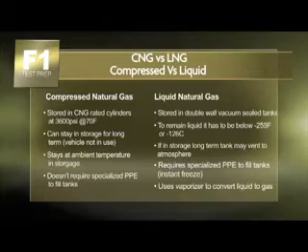Okay, fuel basics. Compressed natural gas is basically methane, CH4. Methane is lighter than air, so it's going to rise to the ceiling. So if it vents or leaks, it's going to rise, whereas propane stays down towards the ground. So keep in mind with natural gas, anything that leaks out of it is going to go up.

The octane equivalent is 120 to 130 octane. From a performance standpoint, that's excellent. We like it from the performance aspect. From an environmental standpoint, hydrocarbon-wise, it is the least reactive with sunlight. Compared to gasoline, gasoline is the worst, compressed natural gas is the best. Natural gas is the way to go from an environmental standpoint.

Also, it forms less CO2 when we burn it, which matters when we talk about fuel economy, because European standards go by CO2 emissions, not miles per gallon. So if we look at it from that standpoint, we produce less CO2, which would equate out to, in a way, better miles per gallon.

We have more BTU than gasoline per pound. Gasoline is a liquid down to 45 degrees below zero, total liquid, while compressed natural gas stays gaseous until 259 below. So when you average it out, in a gaseous state obviously we can't store as much, but we do have more energy content in natural gas if we could get it on equal terms with gasoline.

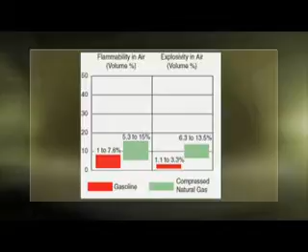Explosivity, there again - how many people have ever taken a match and just tossed it over towards a pan of gasoline and had it light off? That's not going to happen near as much with CNG as it would with gasoline. So natural gas is a little bit safer in that respect, but at the same time, it is still something we have to be concerned about as far as flames and flammability. So it's not a totally safe fuel by any means, but it is a little bit safer than gasoline to use.

Okay, general safety. Now, general safety for natural gas. First and foremost, we're going to store it in tanks between 3,000 and 3,600 psi. The thing to keep in mind about that, since it is under pressure, if we get a leak, we're going to end up with some refrigeration or coolness feeling. But the thing to keep in mind is that it is stored at ambient temperature.

It has detection fragrance added to it also, so keep in mind that compressed natural gas has an odor to it. If you've ever had a gas stove at home that hasn't lit off, you'll have that same odor.

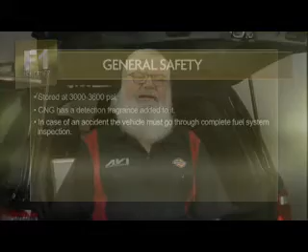If you have an accident with the vehicle, you have to go through a complete inspection of the fuel system to make sure there are no leaks, no damages to anything. We have tanks that have weight associated with them. We have to make sure that they stayed mounted down, didn't move, didn't cause any damage at all. Same thing with the fuel system - we have to go through and make sure there are no leaks out of it at all.

If you've got to depressurize the fuel system before any repairs are done, you want to make sure that there isn't any pressure to the system. Keep in mind, our base system coming out of the tanks is 3,000 to 3,600 psi. Once we're going into the vehicle, we could have pressures as high as 150 psi, depending on the type of system that we have. So if we're going to do a repair, we have to depressurize it properly.

And then after any repair to the system at all, we have to do a thorough leak test using the proper type of leak detection methods to make sure that we don't have a leak. There again, the problem that we have is that we could have a fire that could develop - same thing as with gasoline. If we get an explosive atmosphere under the hood or around the vehicle because of a leak, we don't want it to actually cause a fire and burn down.

Vehicle safety should have a visible label in the engine compartment that identifies the vehicle as being CNG fueled. Our fueling connection should be labeled as CNG. As you can see over here, we have our vehicle sitting next to us - it has the CNG label by it.

If you have any O-ring that's there on the fitting when you service a fuel system, you have to replace the O-rings that are there. The O-rings are supposed to be new anytime you break the fuel system loose. All tubings and hoses have to be permanently marked that they're CNG. So same thing as if you're doing stuff with brake lines and brake hoses - same thing with the CNG. They want to make sure that it has the CNG approval on it for what it's used.

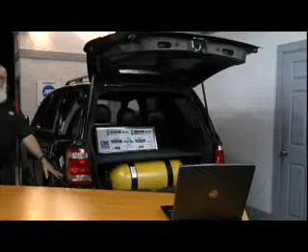So at the same time, we have a specialized dash cluster that shows how much we have in our tank, and then we have our compressed gas engine assembly, which has its special hardened valve seats so it can actually operate properly, along with the pressure regulator.

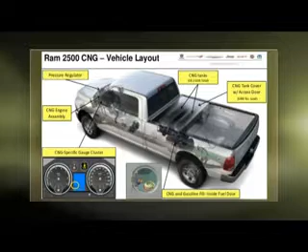Shop safety, when you're going into it, all electrical outlets or anything electrical has to be at least 18 inches below the ceiling. You need to use explosion-proof lights. We want to make sure there aren't any sparks that could cause an explosive atmosphere to go off. You want to consult NFPA 52 and 30A regulations along with your local, state, and federal guidelines as far as setting up a shop to do it.

Most shops that are doing repairs right now have been through that, and the one thing to keep in mind is your local fire marshal is the one that has to say over anything concerning regulations as far as what you follow. You need methane detection and additional ventilation to go with it.

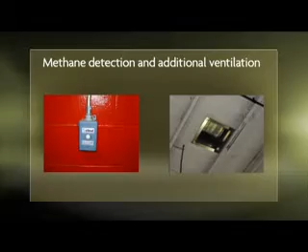On the slide I just brought up, it does show part of the detection as far as methane. It also shows additional ventilation that has been put in the roof of this facility where I took the picture. The thing to keep in mind is if methane is detected, the vent automatically opens and vents the entire shop, allows the bay doors to come up automatically so we can move 8 times the amount of normal air through the shop to get rid of the methane.

And this could happen even if you were not at the shop at the time. If the methane detector went off, your bay doors go up automatically, the fans turn on, and it sucks all the air out so we don't have a fire.

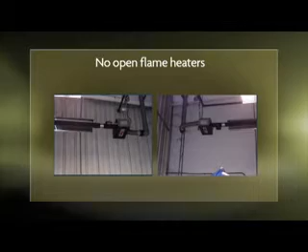No open flame heaters at all. This came from a shop up north, but we have radiant heaters and it's all entirely enclosed, so we don't have any type of flame that could come through. If you're working down in the south, obviously that probably wouldn't be an issue. You can go out underneath a carport somewhere, but where I'm from, up north in Indiana, you definitely need the radiant heaters in the shop.

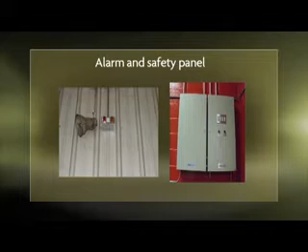Alarm and safety panel. That's part of the methane detection and part of the ventilation requirements that they have. You're going to have alarms that go off. It shows on the pictures there, you have 2 different lights that are going to flash and the actual detection panel that goes off. That's all part of the system that goes in.

From a cost standpoint, it is going to involve some high investment dollars to be able to get in to do repairs. Keep in mind, if you're working on a system where the tanks are removed from the vehicle or they're vented totally all the way, now you don't necessarily need this stuff to be there. We'll be coming up to doing vehicle inspection and condition in the next segment.

Okay, vehicle inspection for condition, suitability, and compliance. Now, this is pertaining mainly to aftermarket conversions. OEMs have already addressed a majority of these issues. So keep in mind what I'm talking about here is if you want to do a conversion on a vehicle. When we go to convert a vehicle, things that we have to keep in mind.

Engine condition. The engine has 100,000 miles on it and needs to have some rebuild done to it. You're going to have to do that before you do the conversions. You have the increased weight of the natural gas cylinders themselves. Depending on the type of cylinder that you use, you could be talking of adding as much as 1,000 pounds of weight to the vehicle just for storage of the CNG.

Ride height specifications, if I'm going to add that much weight to the vehicle, it's going to affect the ride height. Road clearance requirements: the specification for road clearance, if it's under 125-inch wheelbase, is supposed to be 7 inches with flat tires. So if you're going to store tanks underneath the vehicle, you're going to have to do some measurements to do that. If it's greater than 125-inch wheelbase, now it's 9 inches of clearance.

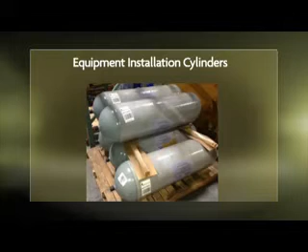When we look at cylinders, we have different types of cylinders that you can see. So keep in mind that when we start putting the system on, the cylinders we put on are going to be an issue. And when we come to our next segment, we're going to talk about the actual different types of cylinders that there are and what the costs of those are.

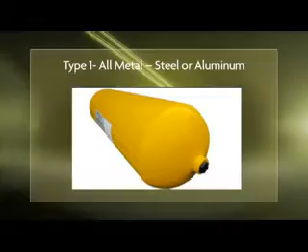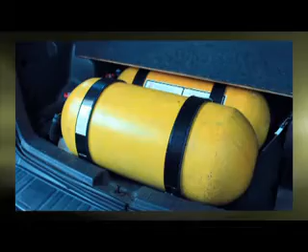Now that we're getting ready to do the conversion types of cylinders, the first type we're going to talk about is a Type 1 cylinder. Type 1 cylinders are made out of all steel or aluminum. This vehicle right here has Type 1 cylinders in it, and as you can see, they're nice and yellow, but they also look fairly large and bulky.

But they are the most inexpensive type of cylinder out there. They are the heaviest though. So if we look at considerations on cylinder types, a Type 1 cylinder would be the cheapest way to get in, but at the same time, it's also going to be the heaviest and going to require the most modifications to the vehicle.

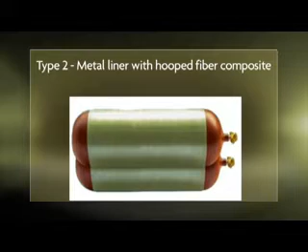Now, a little bit lighter, a different type of cylinder would be a Type 2. That's a metal liner with a hooped fiber composite. The biggest difference is I just got a little extra protection using the fiber composite on the cylinder, and I can take a little bit of the metal away from the actual cylinder construction itself. That lightens up the weight some. So from a cost standpoint, we just about tripled the cost of our cylinder now.

The next type of cylinder is a Type 3. Type 3, we have a metal liner that's completely wrapped or enclosed by a fiber composite. Now there's two things that go with that. One is when we fill a compressed natural gas cylinder, we get heat. The metal liner on the cylinder helps conduct the heat away so you get a more complete fill. So on a Type 1, Type 2, and Type 3 cylinder, that metal liner is going to act as a really good heat sink.

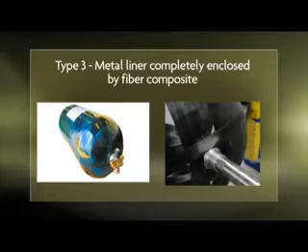On a Type 3 cylinder, the metal liner is a little bit thinner, so now we're actually saving some weight in the vehicle, which allows us to have better weight savings. The fiber composite that goes around there is going to give us a little bit more protection as far as durability.

And then finally, the Type 4, we have a thermoplastic liner that's wrapped by a fiber composite. Now this is the lightest, but it's also the most expensive, so now you have cost versus expense coming into play. We have a total plastic liner wrapped by a fiber composite. So basically, we went from a 1958 Cadillac to a Lotus made out of all carbon fiber as far as weight, if you want to talk performance of a cylinder and relate it to a car.

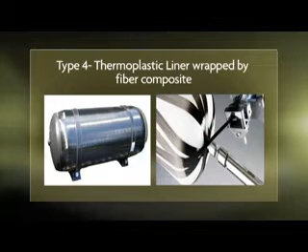But the thing to keep in mind is the Type 4 is the best as far as weight savings, so I wouldn't have to worry too much about adding a whole lot of suspension modifications, as far as springs, to a vehicle for it. The next slide shows the different types of cylinders as far as a cutaway. A Type 1 cylinder, since it's all metal, with filling and unfilling it, all the stress of the cylinder is going to be supported by the metal cylinder itself.

In a Type 2, when we put the composite hoop around it, that cylinder is taking 45% of the stress, and the composite is 55% of the actual stress. In a Type 3, the metal liner takes 20% of the stress, and the composite fiber takes 80% of the stress of filling and unfilling that goes with pressurizing and depressurizing the cylinder. Last, on the Type 4, the composite wrap takes 100% of the stress that goes with pressurizing and depressurizing the cylinder. With that being said, that allows me to use the lightest weight.

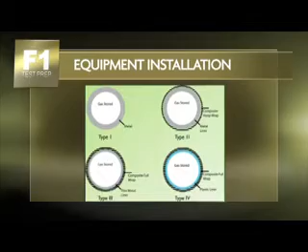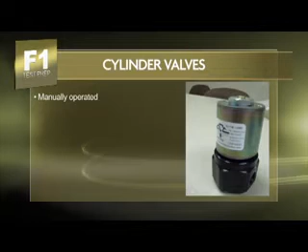Okay, now cylinder valves. We have two different types of cylinder valves that we can come across. One of them is manually operated valves. I don't think I need to explain that too much - obviously, you're going to have to go out and do it.

The other is electrically operated valving. Electrically operated valves are normally closed. They're going to be energized or turned on either by the ECM or the ignition switch. So the thing to keep in mind is if I have an electrical valve, I still have to have a way of manually overriding in case I have an electrical failure if I have to vent the tank.

Now, the next slide I brought up is a tank valve wrench. Most manufacturers, unfortunately, use their own methods for being able to put a tank valve in, so you have to have their tank valve wrench to change their valves out. The thing to keep in mind about valves is if I have to change the tank for some reason, I'm going to change the valve out - I'm not going to get a new tank with the valve. So the tank valve wrench is going to work really well if it was designed for that valve, so it actually takes it on and off without causing damage to the valve itself.

The other thing is the pressure relief device. The pressure relief is what's going to actually come into play if I get too high of a pressure in the tank. Tanks are rated to a certain amount. If my tank pressure exceeds 5,000 psi, I'm going to vent that tank. That way I don't have to worry about the tank exploding. So I have a burst disc built into the valve assembly that allows the pressure to get vented out of the tank if the tank pressure gets too high.

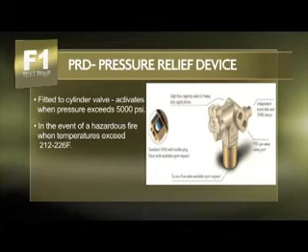The other thing is, if there's an event of a fire, same type of thing - it's going to cause the pressures to increase. Now, the pressure relief device for heat is like a lead plug that melts out and allows the tank to vent. That is going to be between 212 and about 226 degrees. So I have two actual pressure relief devices that are part of the valve - one has to do with pressure, the other has to do with heat. It's all designed to get rid of the pressure in the tank and allow it to go to the atmosphere. Sure, there's a fire going on, but what would you rather have? A little extra flame or a big boom that can do more damage to people? I think I'd rather have a little extra flame myself.

Okay, tank venting. Now, if the tanks are underneath the car, tank venting, no big deal - we can just let them vent. But if it's actually mounted inside a passenger compartment, like behind the back seat or in the trunk area, then we actually have to run vents outside the vehicle. So venting the tanks outside the vehicle, the slide that I have here actually shows the tank vent coming from inside the vehicle outside, and then it also shows a 90-degree manual shutoff valve for shutting the system off.

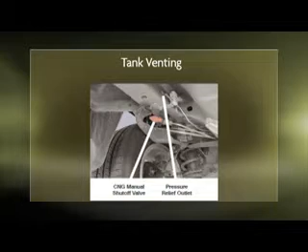On this picture, you're reaching through the wheel well right behind the left rear tire to go in and hit the manual shutoff valve. Another type of manual shutoff valve here shows an actual panel. You cannot have them locked, you can't use a tool. You can have it to where it uses a latch to keep it shut, but there can't be anything to lock the panel to get to the manual shutoff. So it has to be a quarter turn type or a ball valve, and it has to be clearly marked with red, blue, or black letters on a white or a silver background.

As you can see, this panel here also has gauges on it to show the high pressures and the low pressures of the system while it's operating, and it does include the fill for the vehicle too.

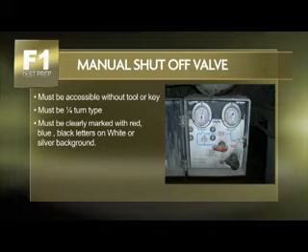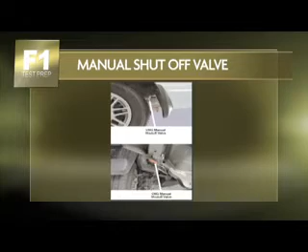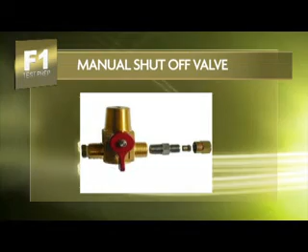If something were to happen and you needed to turn it off, say you had a major leak under the hood, you could reach in behind the wheel and shut the system off without worrying about it venting out. If you were doing an add-on system, here's a manual shutoff valve, something as simple as that, as long as it's a 90-degree type, but this is another type of manual shutoff valve.

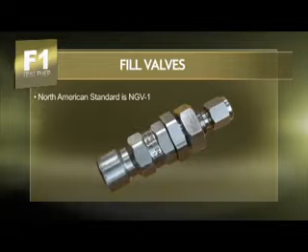Now, fill valves and filtration. First on fill valves. All fill valves in North America follow NGV1 standards. That's clearly marked on the actual filling port itself. They're color-coded for different working pressures: green is 2,400 psi, blue is 3,000, and yellow is 3,600 psi.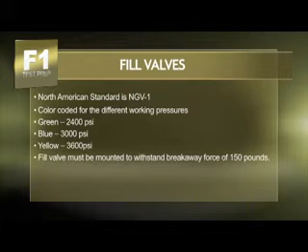The fill has to be mounted to withstand a breakaway force of 150 pounds. The hoses used for filling have a breakaway support set at 150 pounds, so it makes sense that the fill mount has to withstand the same. If you drive away while hooked up, it has to withstand 150 pounds of force so the hose breaks off and the built-in safeties take effect, instead of you breaking off the fill port and emptying a tank with 3,600 psi in it.

As far as filling it, you have to have enough clearance to allow the nozzle to hook up to the vehicle. So when deciding where to put this fill valve during a conversion, keep in mind you need enough clearance to fit the fill nozzle. If you wanted to put it where the fuel door is, there might not be enough room, so you might have to put it somewhere else, whether outside the vehicle on the side or even under the hood.

No matter where you put the fill valve, it has to be able to withstand that 150 pounds of force. The other thing to keep in mind is you always want the little cap to fit on and go on there to keep all the dirt out so you can actually utilize it properly.

On filtration, the main concern is moisture and oil from compressing the natural gas. Just like with an air compressor, when you compress air, do you get moisture out of it? Yes. Same thing here - the way the compressor works to compress natural gas, there's always going to be a bit of moisture and some oil from the compressor itself. That oil gets transferred to the gas and can end up in the tank. If we don't filter it out, the tank can become overfilled with oil and moisture, which takes away from the fill capacity of the tank.

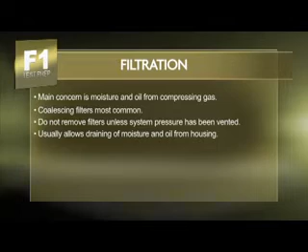The other thing to keep in mind about filters is when you go to service them, you want to make sure the system has been fully vented so there's no pressure on it. It's important to vent the system before you service a filter. But if all you want to do is drain out the oil and water accumulation, there are drains built in where you can just open that up and allow it to drain out without taking the filter off completely. So that's the good thing about that.

Next, we'll be talking about pressure regulators.

Okay, now we'll be talking about pressure regulators and fuel mixers. First thing I'm going to talk about is the pressure regulators.

We have three basic types of regulators that are used. One is a multi-stage system where one regulator takes the tank pressure down in 2 or 3 stages to slightly above or below atmospheric, depending on the engine RPM.

Another type is a 2-regulator system. We have a high pressure regulator that reduces the tank pressure down to about 70 to 180 psi. A low pressure regulator then takes it down, in a couple stages, to just how we measure it in inches of water with a manometer.

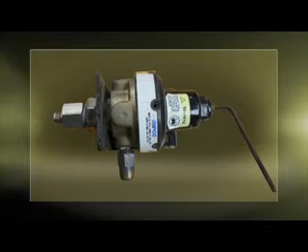The next is a single stage system that drops the pressure from about 3,600 psi down to about 40 to 130 psi, allowing us to use a valve body and injectors to inject it into the engine. Depending on the type of system we have, depends on the regulator type system that we use too. This is a single stage regulator here that actually took the system down from our 3,600 psi to a usable pressure of about 40 to 130 psi.

Air fuel mixers, we have several different types. First is an air valve type mixer that can be located above the throttle plate, or we have a Venturi mixer which works roughly the same way, but we can make these a closed loop system. This works basically on demand based upon how much air enters the engine. It goes through the mixing valve and makes a diaphragm move, which allows more fuel to go in according to how much air is going into the engine.

Next, we have a throttle body system, same as throttle body fuel injection, except we have a throttle body CNG injector that sits above the throttle plate. We inject the natural gas, and as it goes by the throttle plate, the gas and the air mix together for going into the engine. That is a speed density based system, works pretty much the same way as the speed density throttle body injection systems we had in the 80s.

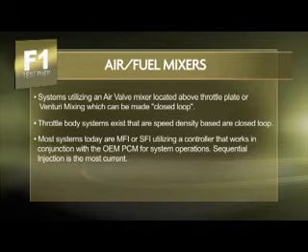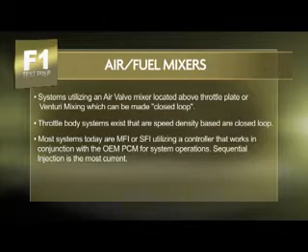Now, leak testing and repairs. Thorough leak testing is vital in the performance of any CNG system. All leaks have to be repaired that you find. The complete system needs to be tested using natural gas.

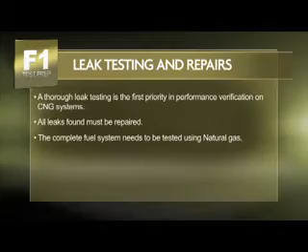If you ever have to replace a tank, there are steps that allow you to do initial testing without using natural gas, but any final leak testing needs to be done using natural gas at the pressure of the system itself.

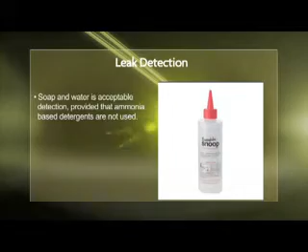The first type of leak detection, which is the most common and also the most popular, is soap and water. As long as the soap is not ammonia-based, you can use it on the system. Keep in mind, if it has an ammonia base, it's going to be corrosive to the fuel system you're putting it on, which isn't very good.

This picture here shows Snoop. This actually changes color when a leak is detected, so it's an additional aid. But if you're just using regular soap and water, you're looking for bubbles. As long as there's bubbles, there's a leak, so you don't want to find any bubbles.

The next type of leak detection is an electronic leak detector that can detect hydrocarbons. Here's one here. Basically, it works the same as an AC detector. You turn it on, you adjust it, you go around the system looking for it to sit there and beep. So there are different types actually out there on the market.

Some are as simple as just a beep. Other ones actually tell you what the concentration is and what type of gas it is. And then the last one is a high frequency sound detector. You're actually going to put on a headset and go along, and when you find a leak, it's going to give a high frequency sound that shows up in your hearing. That'll tell you there's a leak there.

I don't know about you, but most shops that I work with, I don't think this would be very popular. I could be wrong, but I think soap and water is probably what everybody uses. If you're somewhere you can't see bubbles and you know there's a leak there, now you're going to get out your electronic detector to use that.

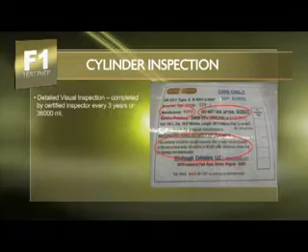Next, we actually have the detailed visual inspection that has to be done by a certified inspector. Certified inspectors have gone through rigorous material as far as what it takes to do the inspection. You either pass or fail on the visual inspection. You have a copy up on the screen now that you can see the actual inspection sticker.

All tanks are rated for a period of roughly 20 years. It shows when the tank was produced, when you're not supposed to use it afterwards. Once you get done with the visual inspection, the inspector actually marks on the tank when the inspection was done and if it was a pass.

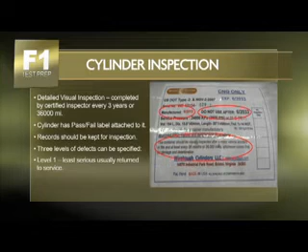You've got 3 levels of defects. Level 1 is the least serious. It can be returned to service, and it's going to be noted what the defect is. If you have a level 2, you're going to go to the manufacturer and say, hey, I've got this problem. Between the inspector and the manufacturer, they're going to determine whether or not we can still use the tank or whether it's going to be rejected.

And then you have a level 3. We're going to actually condemn the cylinder, remove it from service. When a cylinder is removed from service, it is going to be made inoperable. You're going to either chop it in half or drill holes in it so it cannot be used.

So the thing to keep in mind is the primary responsibility is the owner of the vehicle to do the maintenance. Keep in mind, it's got to be inspected every 3 years or 36,000 miles, and it's the owner's responsibility for keeping and maintaining the records of that.

Okay, now we have a video for you to watch concerning more on cylinder safety and inspection.

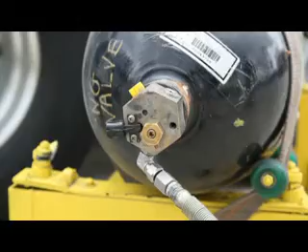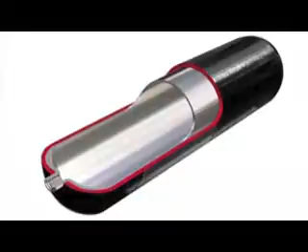Compressed natural gas, a standard for safety. In the early 1990s, the NGV industry brought together industry stakeholders, research organizations, and regulatory agencies to start the development of a standard for CNG cylinders. The standard was based on existing pressure vessel standards and placed no limitation on materials and methods of construction, considered both internal and external container environments, and most importantly, incorporated a certification process for design, manufacturing, and quality control.

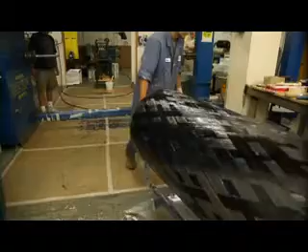The standard ANSI NGV2 is now in its 4th edition. At the same time, the U.S. Department of Transportation's National Highway Traffic Safety Administration published regulations to cover the use of CNG cylinders as vehicle fuel tanks under FMVSS number 304.

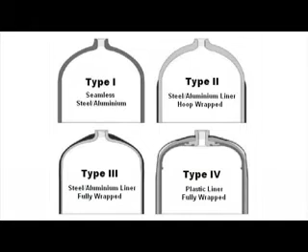Regulations covering the fuel system integrity in FMVSS 303 will be discussed when we cover crash testing of vehicle fuel systems. One of the important design considerations for CNG cylinders is weight reduction, especially where large volumes of fuel need to be stored. Weight reduction of cylinders has been achieved by several means and has led to 4 type classifications of cylinders. The Type 1 cylinder is all metal and has achieved weight reduction by using higher strength materials and production technologies.

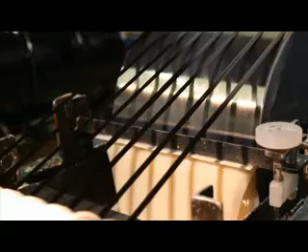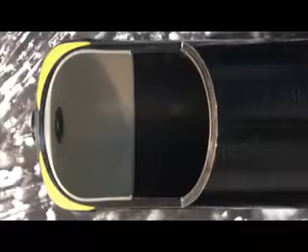Composite cylinders use a combination of materials for construction. Type 2 cylinders have a thinner metal body and are hoop-wrapped with resin-impregnated high-strength fibers such as glass or carbon. The Type 3 cylinder uses a thin metal cylinder and is fully wrapped, including the dome ends, with the same high-strength fibers and resin. A Type 4 cylinder uses a non-metallic liner and is fully wrapped with resin-impregnated fibers that can take the full stress of its compressed gas.

As we stated earlier, the pressure vessel or cylinder standards were originally developed for industrial gas cylinders, not specifically for NGV applications, and they included production tests such as hydrostatic test and leak test of each cylinder, and batch tests such as burst test, cycle test, and coating thickness and adhesion test. Many of those tests have been carried forward to NGV applications.

Additional design qualification tests were added to address specific NGV conditions, including ambient cycling test, environmental test, extreme temperature cycling, hydrostatic burst test, composite flaw tolerance test, drop test, bonfire test, penetration test, accelerated stress rupture test, permeation test, natural gas cycling test, and the leak before break test.

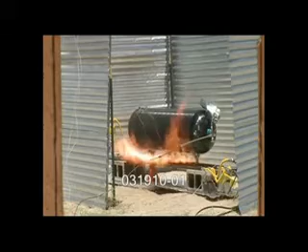The bonfire test is essentially a fire test that replicates a vehicle fire. The cylinder and the pressure relief device, as part of the safety system, are exposed to a fire, and the pressure in the cylinder is released by the PRD before any possible failure of the cylinder.

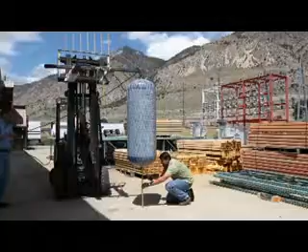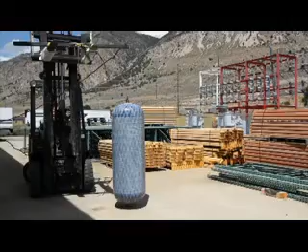The drop test is designed to replicate potential physical impact damage to the cylinder as may happen in a vehicle accident. The cylinder is dropped from a specific height onto the dome in one test and onto the side wall in another. The cylinder must still pass the designated burst test with no degradation to pass the drop test.

The penetration test uses gunfire to replicate through-wall damage in an accident. The cylinder will release the gas at the penetration point, but will otherwise remain intact.

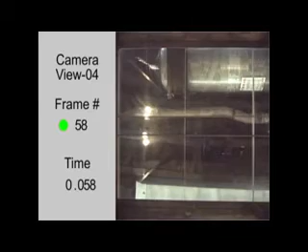The next test run shows the rear end impact. The frame of the vehicle absorbs the impact and there is some movement of the fuel system, but as before, it must not leak any of the stored CNG to meet the safety requirements.

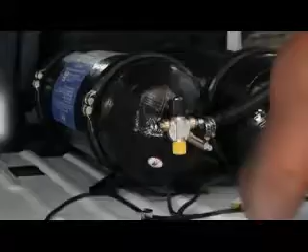The safety record of CNG vehicles has been exemplary. CNG fuel systems and cylinders, when designed, manufactured, installed, and maintained by the existing codes and standards, have a history of safe and reliable operation for their expected life.

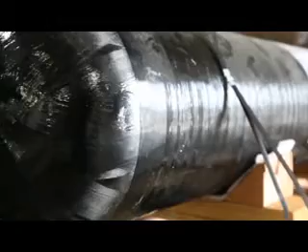There are well over 130,000 natural gas vehicles operating in the U.S. today. With the expected continuation in the price differential between natural gas and liquid fuels, there will be accelerated growth in the use of natural gas vehicles in the years to come. The safe and reliable compressed natural gas cylinder is an important part of this transformation to natural gas as a vehicle fuel.

System diagnosis and repair. Now, there's three different types of systems out there you can encounter. Keep in mind we're talking about light-duty vehicles only. We're not talking about what you're going to find in medium and heavy-duty.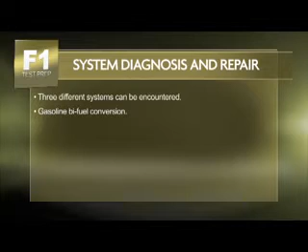You've got gasoline bi-fuel conversion, which is gas and natural gas. You've got dedicated conversion or OEM feedback control injected CNG systems, or you've got dedicated fully closed-loop feedback sequential injected CNG. So there's those three different types.

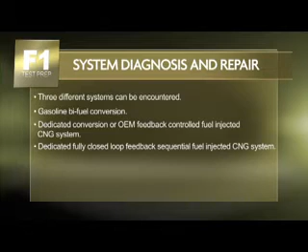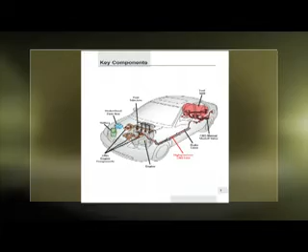So, system diagnosis: we're going to utilize additional processors, injector driver modules that work in conjunction with the factory PCM. The PCM diagnostics and diagnostic link connectors are going to be the same. If we added the CNG processor to it, you're going to utilize a laptop or a computer that you hook up with the USB port to do diagnostics off of the added-on CNG system.

So keep in mind, if I've added a system on, I'm going to be using another protocol for actually going through and being able to get the codes out for the CNG system. The OEM sensors and such are still going to utilize the OEM PCM diagnostic link connector for going and getting the related codes out.

So, on a dedicated system, I removed all the gasoline system that's on the car, including the EVAP, and replaced it with CNG components. I sent out the actual PCM, and it's been reprogrammed for CNG only. So now I'm actually going to go through the OEM scan tool, or a generic one, and hook up to the diagnostic link connector for doing my diagnostics.

So on a dedicated vehicle, we've stripped out all the gasoline components, and now we're going to utilize the OEM PCM, going through the diagnostic link connector on that.

Service manuals are what you're going to need for diagnosis. We use trouble tree charts on the CNG systems just like we would on regular gasoline. Most of the systems are designed to run transparently with the OEM PCMs if they're an add-on unit, so we can actually use bidirectional information on the system.

So keep in mind that there's transparency on the systems themselves. If we use an injector controller, the reason we use it is because there's higher current demand on the injectors than with a factory type injector that we use for gasoline. So we have to use the injector controller for that higher amount of current.

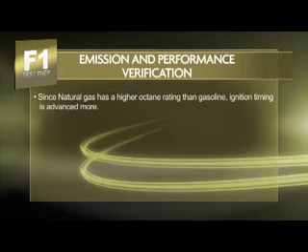Okay, emissions and performance. Natural gas has a higher octane rating than gasoline, so ignition timing can be advanced more. So if we're running a bifuel vehicle, there's going to be two different timing advance curves that need to be run on the vehicle—one for gasoline, one for natural gas. We have to do this because if we stick with the gasoline timing curve, our performance on natural gas is going to be really poor.

So we want to make sure we have the two timing curves. The other thing is on emissions—natural gas produces less CO2 compared to gasoline, so our emissions will be greatly reduced. We have fewer carbon atoms, less carbon buildup in the engine, so it can almost act as a cleaning. If we have a bifuel vehicle running on gasoline for a while, we could get carbon buildup. By running on natural gas, we're actually going to clean some of the carbon out of it.

There's less carbon buildup. The nice thing about natural gas, if we go complete natural gas, is we don't have the tendency of the oil to get as dirty because there isn't as much carbon there. We have a slower burn rate, so main and rod bearings will last longer. The fuel isn't going to dilute the oil like it does with gasoline, so we can extend the oil change intervals.

We are going to have to pay attention to our engine oil to make sure we use the proper type that's compatible with natural gas. Remember the dry fuel issue about the lack of lubrication, so we have to make sure our additive package will protect the engine from things that would cause accelerated wear that we wouldn't have to worry about running straight gasoline.

Natural gas and gasoline perform roughly the same. With today's computer programs, we can make up for the difference to where we end up with very similar amounts of performance and fuel economy too. In most cases, your fuel economy is going to be roughly the same as it was when we switched from 100% gasoline to our 10% ethanol blend we have today, which is pretty much considered negligible as far as the EPA is concerned.